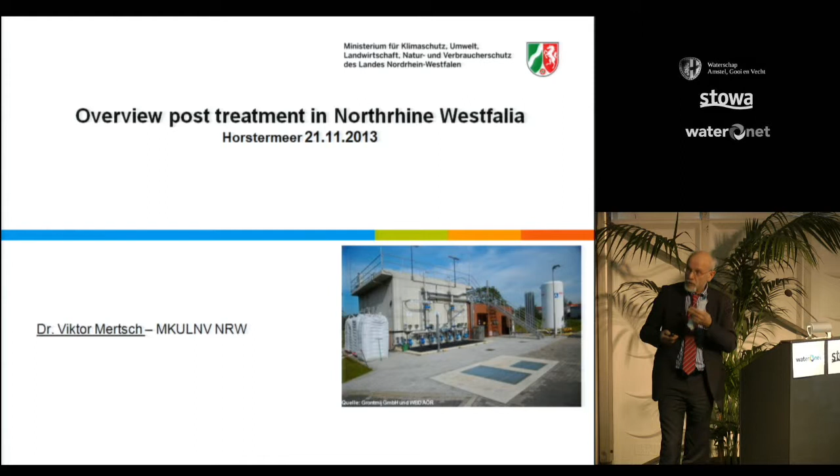So what are we doing in the field of post-treatment, as it's called here? Before I tell this, I will tell you a little bit how wastewater treatment is organized in NRW. We have about 654 or 645 wastewater treatment plants for 18 million people, comparable with the Netherlands. And the number of wastewater treatment works becomes less and less, and we will have about 600 in 5-6 years.

About 300 of these, and this is important, have a population equivalent of more than 10,000. And from this 300, 100 have sand filtration. It was established about 10, 15, 20 years ago for phosphorus removal. Today we have to look, is it necessary to have these sand filtrations, or can we look for another purpose for this part of the wastewater treatment?

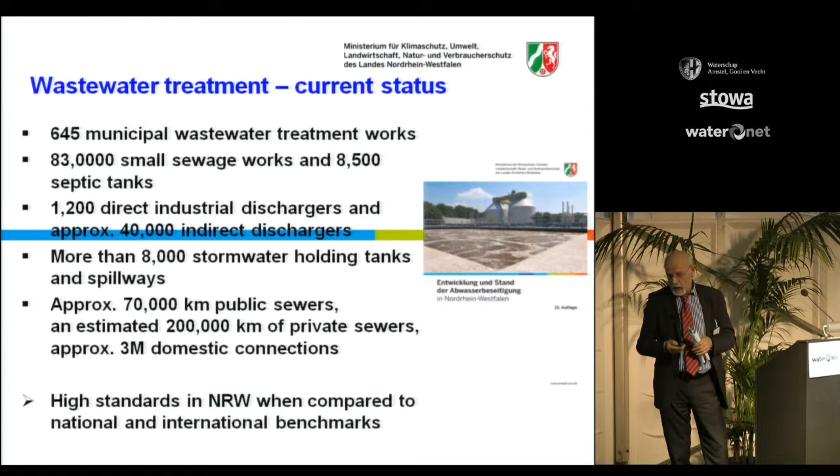Altogether, we think we have a high standard, if we look at European wastewater standards. But if we look at the fulfillment of the European Water Framework Directive, and we look at our waters, our rivers, we see we have a lot of problems. This is one part of one water body. We have about 80,000 kilometers of rivers, divided into 1,800 water bodies.

This is a figure of one water body, and it shows the monitoring 6 years ago, and we had a second monitoring finished now in 2013. The result is that if you look at chemical standards, you will find that about 20% of the water bodies are in a bad situation. If you look at the ecological standard, about 80% are in a bad situation. And if you look for the reason why the rivers are in a bad ecological standard, you will see that one important reason is the amount of micropollutants.

Why is it so? It is so because we look at the smallest animals, and of course for the smallest animals the amount of diclofenac, for instance, in nanograms could be relevant. So that is one reason why we look for the removal of micropollutants.

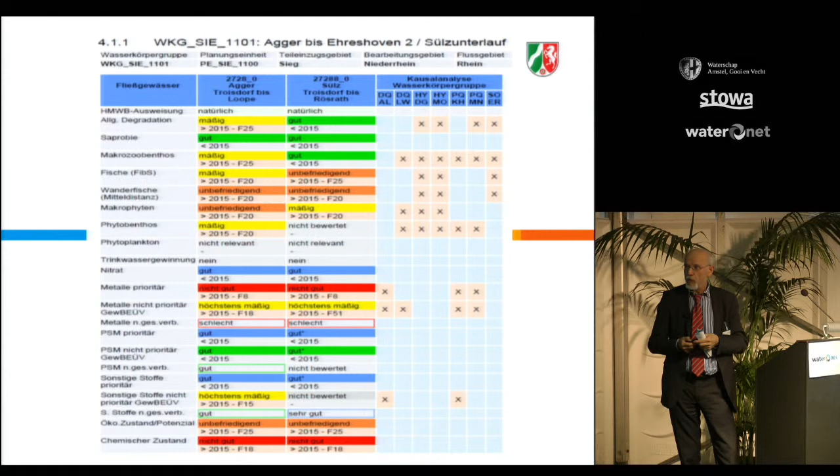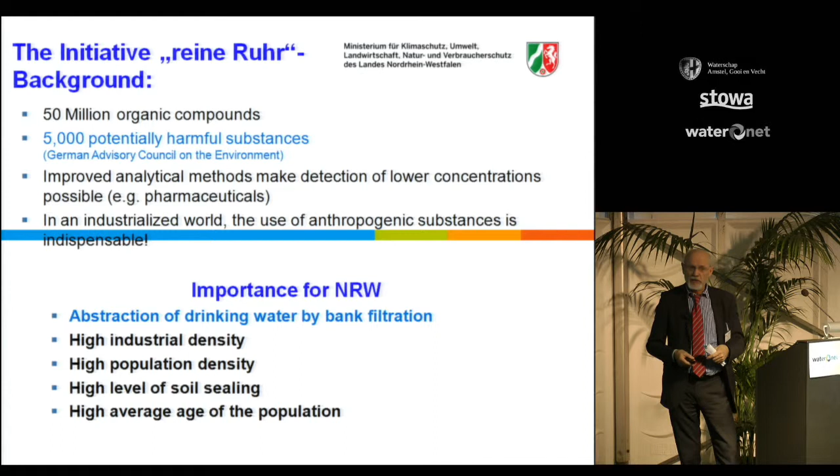But we started 5 years ago, and we started not by focusing on the European standards, but by focusing on our drinking water. We had a big problem in the River Ruhr with perfluorinated chlorinated substances, PFC. That was the reason to start a program, reine Ruhr, to look at what we have to do. We had not only the Ruhr as a river where we get our drinking water - about 70% of our drinking water comes from rivers. Therefore for us it is very, very important to look for micropollutants.

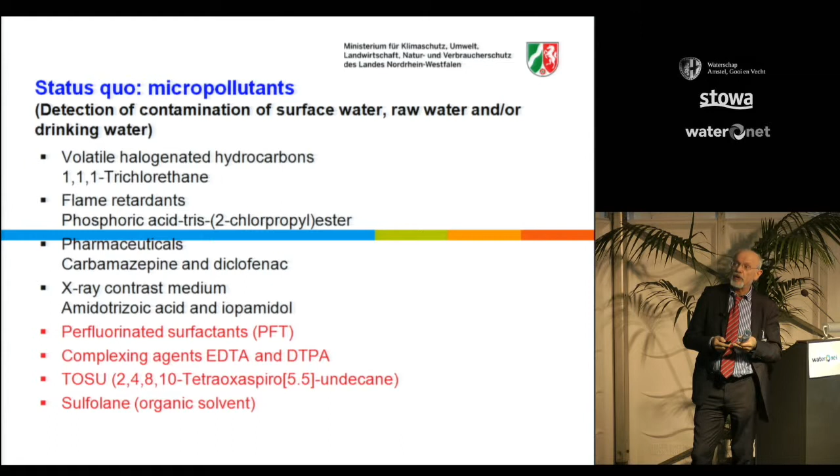In the first step, we looked only at the River Ruhr, at the amount of micropollutants which were in a concentration so high that we had to do something - those are the red ones. I will show what we have done to reduce the amount of these substances. And when we decided to make the program reine Ruhr, we decided to look much more broadly at all possible micropollutants in our river and to decide what we have to do in the future.

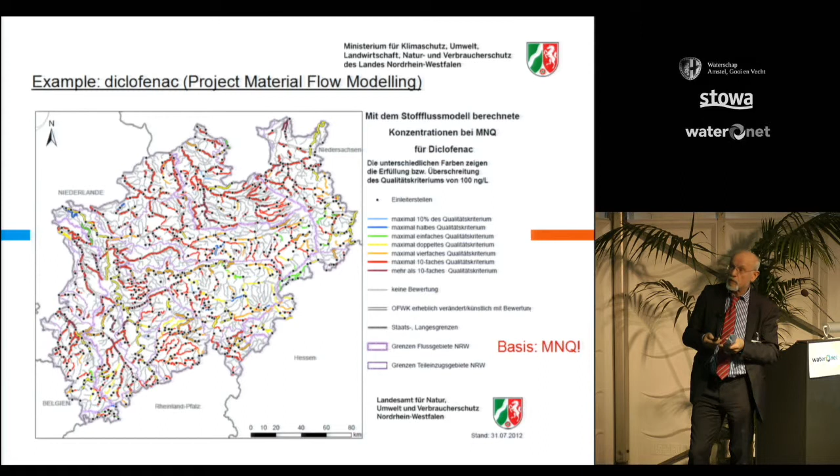For instance, we looked for diclofenac. If you look at the diclofenac levels we mapped with the material flow modeling, from Switzerland I think, you will see that a lot of rivers have maximum concentrations up to 10 times more than what is safe for a small animal. So it is quite clear there should be something done.

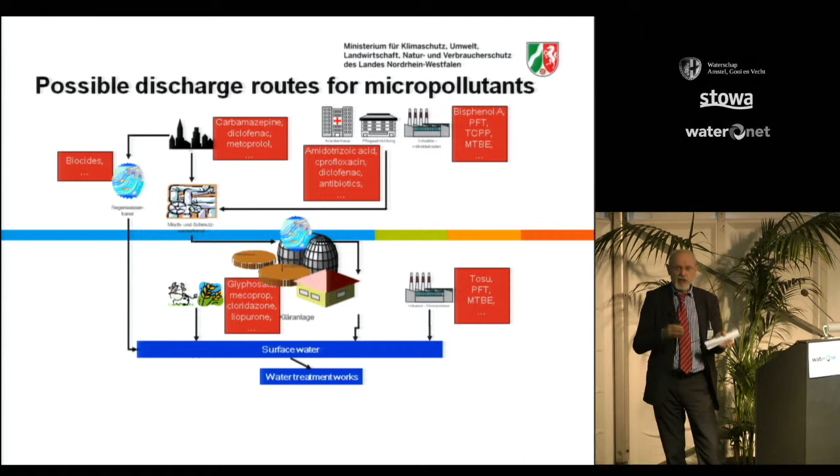So the question is where to start and where the micropollutants come from. We did a lot of work together with universities to analyze the main sources of micropollutants entering the rivers. If you look at the amounts, you'll see that about 70 to 80% of micropollutants come from wastewater treatment plants.

So we did a lot of development work from the beginning of 2008 until now, with 5 million euros. We looked not only at the rivers, but also at technologies, both in industries and in wastewater treatment plants run by communities. In the following parts, I will show you what we have done with the results from this research, and how we tried to reduce the amount of micropollutants entering the waters.

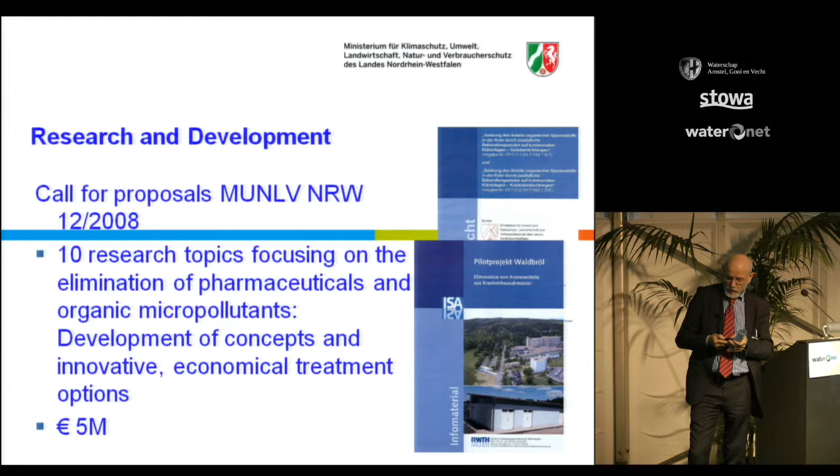First, as I mentioned before, I'm responsible for funding. We have a funding program that means every wastewater treatment plant operator who decides to build new or upgrade his plant, like here, gets 70% of the investment cost for the upgrade. For industrial wastewater treatment plants, we handle it individually, depending on the kind of treatment necessary.

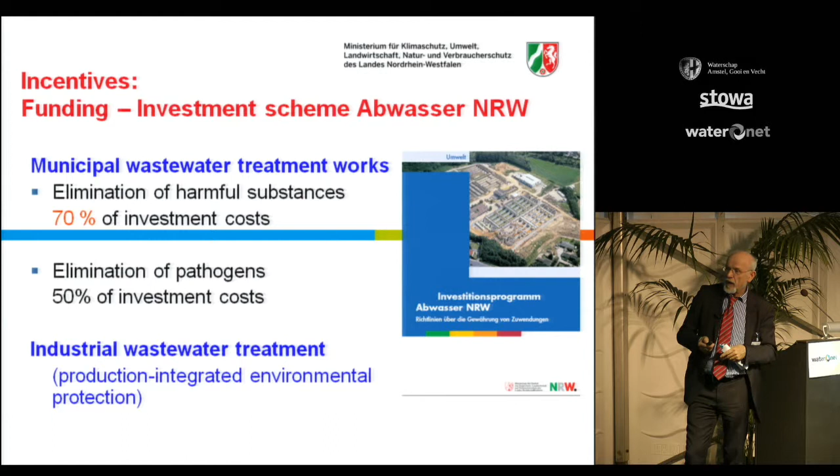So what is done with this money? I forgot to mention, it became clear very soon that it's not only necessary to speak with wastewater treatment plant operators, but with everyone — the politicians, the governors and so on. For this, we opened a Kompetenzzentrum Mikroschadstoffe, and the goal is to promote this idea of reducing micropollutants.

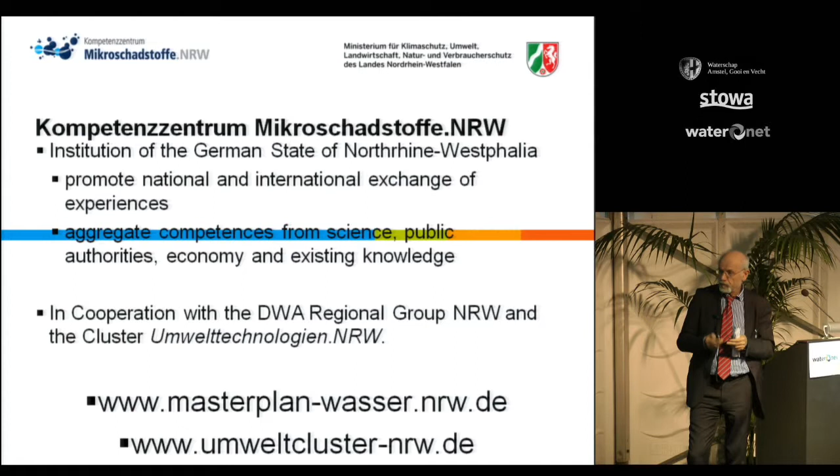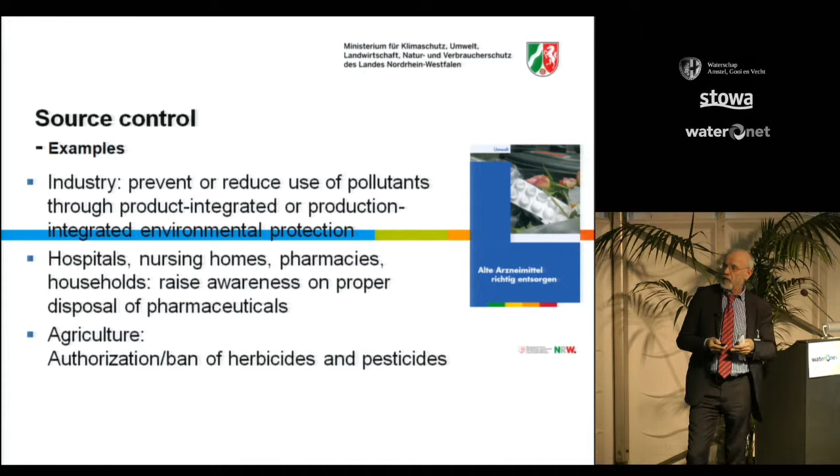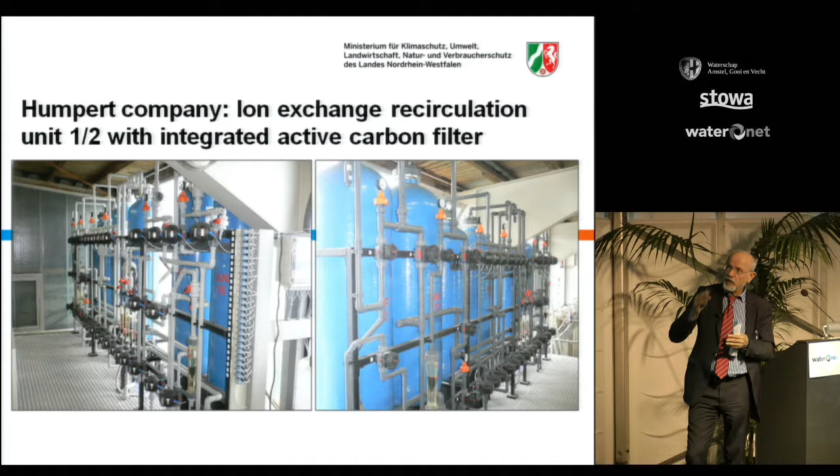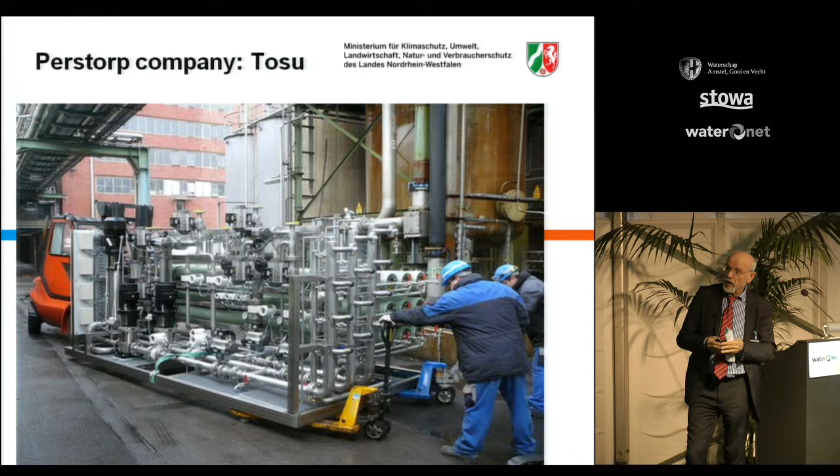Examples of source control in industry: as I mentioned before, we had a big problem along the River Ruhr with some substances, especially PFT. That meant small companies had to change their wastewater treatment very extensively — for instance, ion exchange at Firma Humpert, or the Perstorp company, which had a problem with Tosu. There we needed a very expensive wastewater treatment plant, so a lot of small companies had to spend a lot of money.

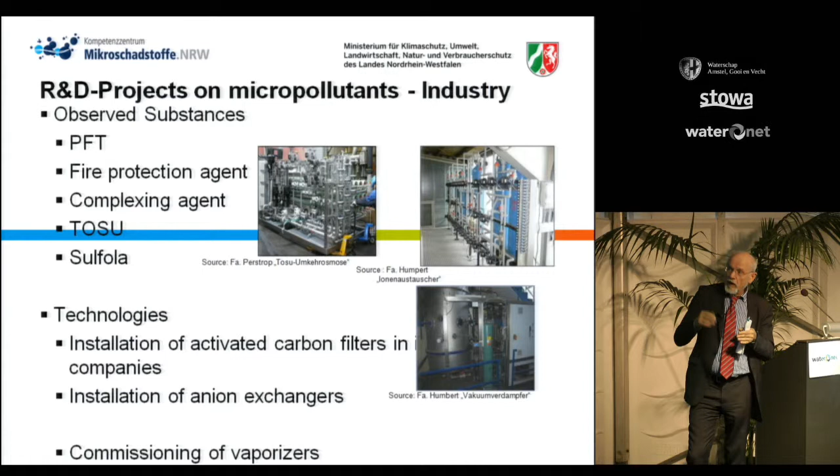To reduce special micropollutants which we don't find in every wastewater treatment plant, but only in special companies or special industrial fields. In this area, we will look to see if there are special industrial fields where we need to take action. We will do this over the next 5 to 10 years.

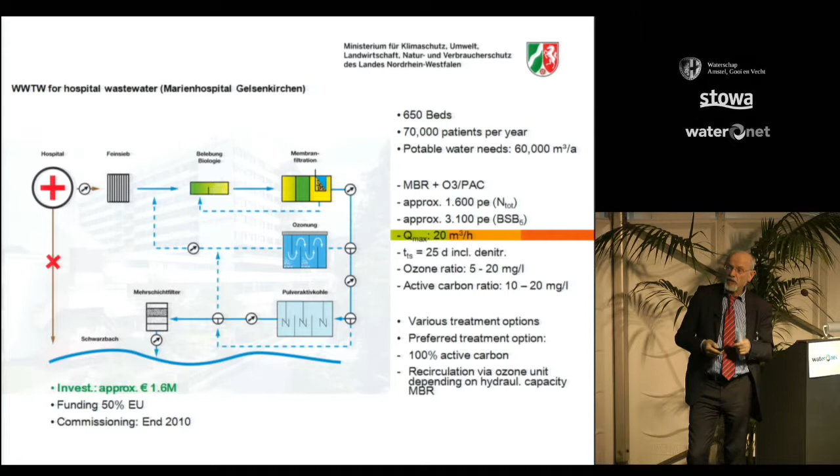We have to do biological treatment before removing the micropollutants, which makes it a very expensive kind of treatment. The investment costs were about 1.6 million euros for one hospital alone, and for another hospital, in Waldbröl, we had to spend 2.5 million just for the hospital wastewater treatment. Nevertheless, you will find some hospitals outside the cities, for instance, where this is still a possible way to reduce micropollutants. But overall, it is not the way we should go further.

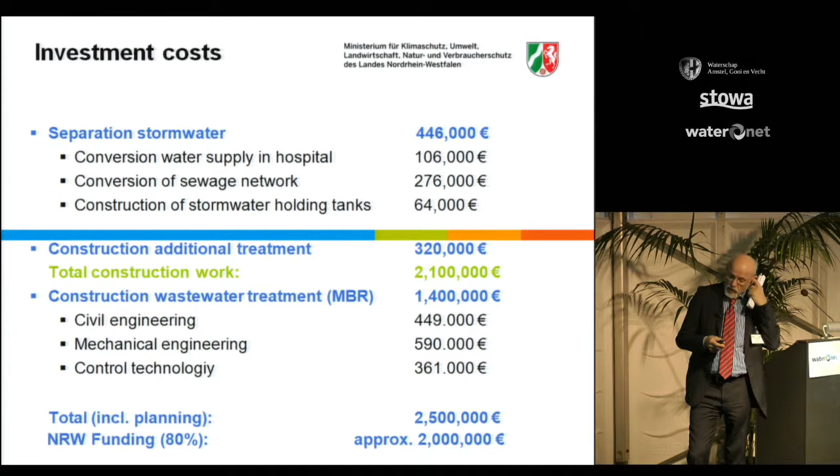Looking at our two hospitals, we also looked to the Netherlands to see what our neighbors do. A very interesting wastewater treatment plant is the Reinier de Graaf Clinic, and in Münster, the University Hospital of Münster is looking at this kind of treatment too, considering whether to use a Pharmafilter like in the Netherlands. Now I'm coming to the part about wastewater treatment for municipalities and what we have done in this field.

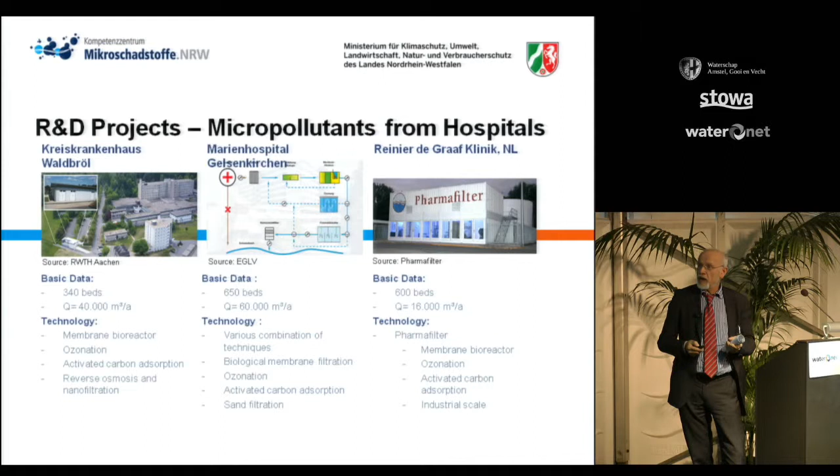We started with 3 wastewater treatment plants. The first one built was the ozonation plant in Bad Sassendorf. This wastewater treatment plant has been in operation since 2009, and we have two more: Duisburg-Vierlinden, started in 2011, and Schwerte, started in 2010.

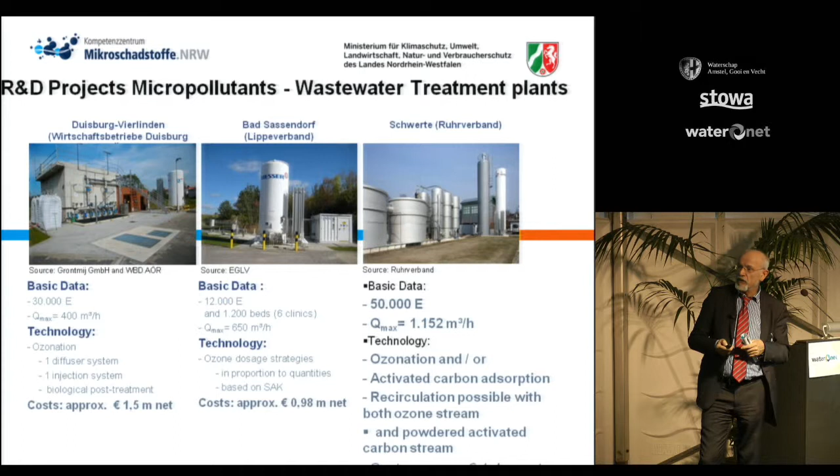From this treatment plant, we have not only the costs for investment, but also the costs for operating. It's very important if you're looking for capital costs for reducing micropollutants. In the meantime, we're looking for other possibilities, other technologies.

One other technology which is very interesting is the Bosman filter from the Netherlands. This Bosman filter is in a pilot plant at the treatment plant of Barntrup, tested last year. If you combine this with powdered carbon, it is much cheaper than using sand filtration. The city of Barntrup will build the wastewater treatment plant next year with this Bosman fuzzy filter. It's a very, very interesting technology.

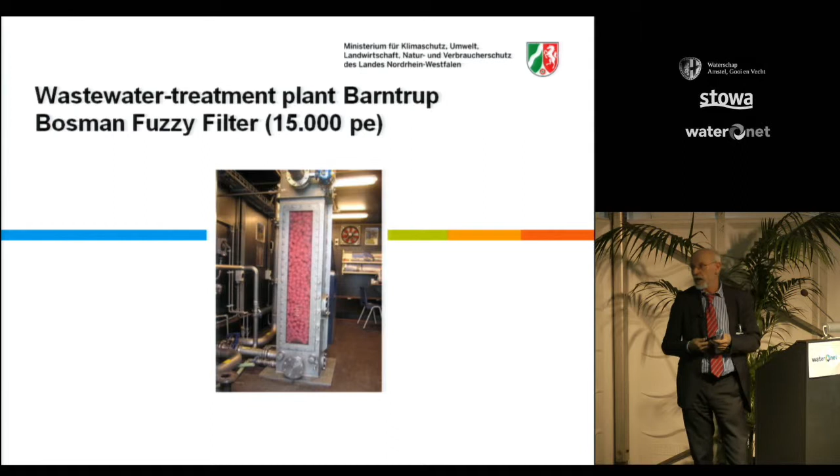We have another interesting technology, the wastewater treatment plant Obere Lutter. It's about 100,000 population equivalent. Basic data is 380,000 population equivalent, but it's less in the meantime. They have sand filtration, and we changed the sand and put in granular activated carbon. This is in total the cheapest way to rebuild a wastewater treatment plant, and it's nothing else like this plant here, but it's an old one.

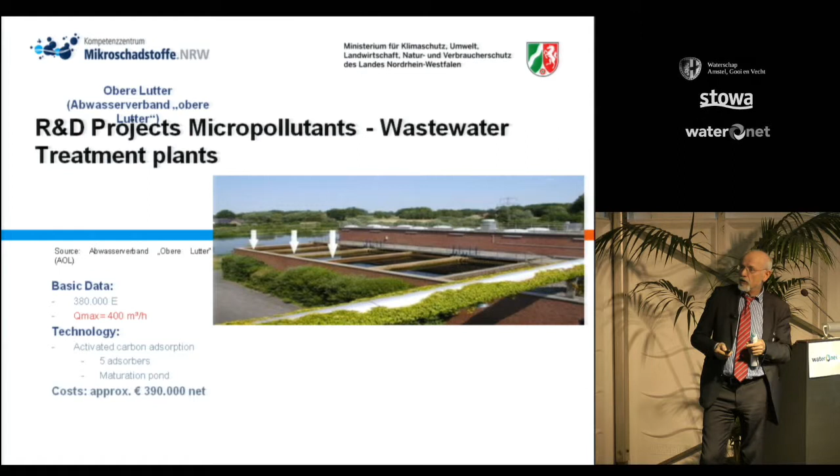So you see, we don't look for a special technology in North Rhine-Westphalia. Every technology can be used, and the decision is taken by the wastewater treatment plant operator. Before he makes a decision, normally he looks at the costs.

This is the map of North Rhine-Westphalia. On the upper left side, the Netherlands starts. You see the river Rhine. And you see here three different colors. The yellow color represents wastewater treatment plants which are rebuilt and which are in operation or start operating within the next year. The red one, and this is very important, are

wastewater treatment plant operators who make a feasibility study. We finance feasibility studies with 70% of the cost, and a feasibility study costs about 30 to 50,000 euros. This is the first step before a wastewater treatment plant operator decides to rebuild his treatment plant.

And besides this, you see this pink color. The pink color represents wastewater treatment plants where scientific pilot surveys are made, not a pilot plant.

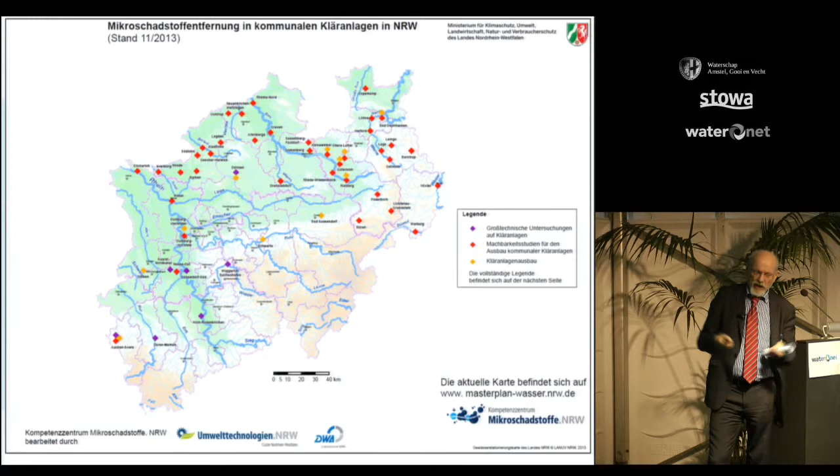In the meantime, we have about 2-3 more of this, about 15 wastewater treatment plants who will rebuild their treatment plants. And you remember, we are looking at about 300 wastewater treatment plants who are possibly in need to rebuild their treatment plant.

Important is that there is no order from the ministry to do this till now. This is all made voluntary, so the plant operator decides to make it.

But if we look now to the fulfillment of the framework directive and the next management plan, which we have to do in 2015, we will have to decide and say to an operator, you have to do it. That will be a bit difficult in public, but I'm not sure if we can go further the way we have done before, because you will find a lot of wastewater treatment plant operators who will do it freely, but there are some who don't want to, and possibly these are the very important ones for the rivers.

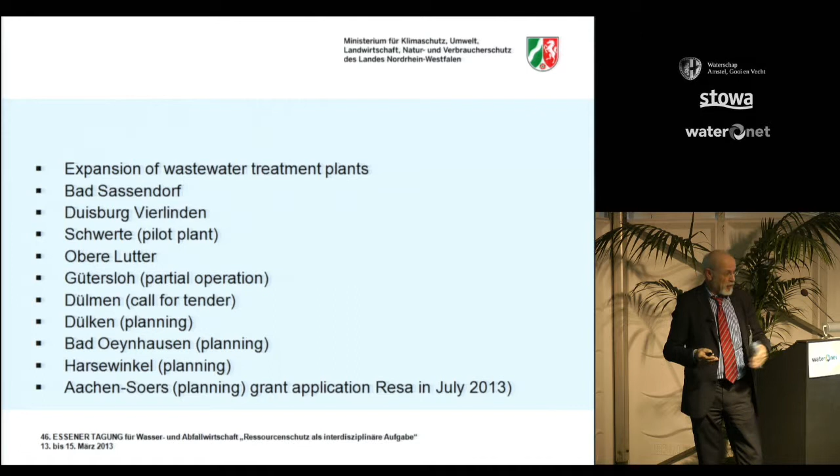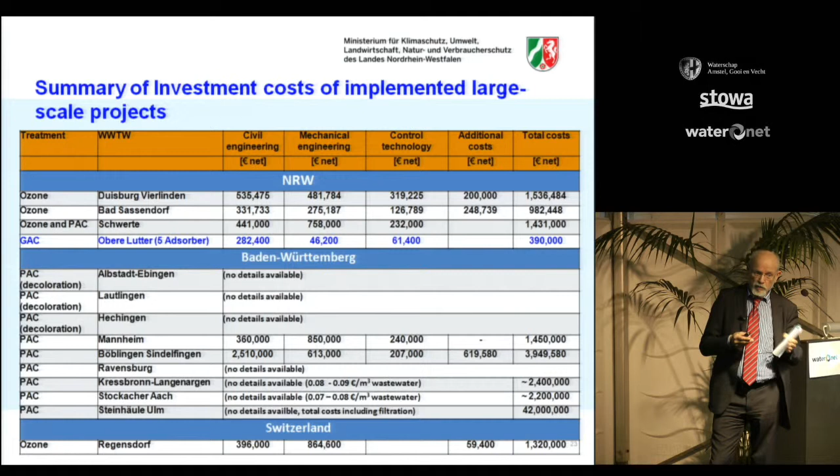So the last 3-4 slides I will show. We look, of course, a lot at the money. And I told you we have now the experience from the feasibility studies and from operating wastewater treatment plants. So we looked for standards to compare the costs of every treatment plant and to decide and to tell the politicians how much it would cost.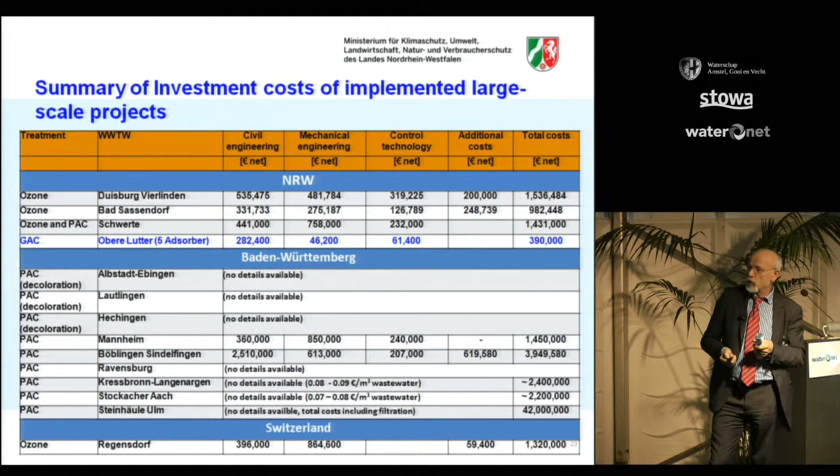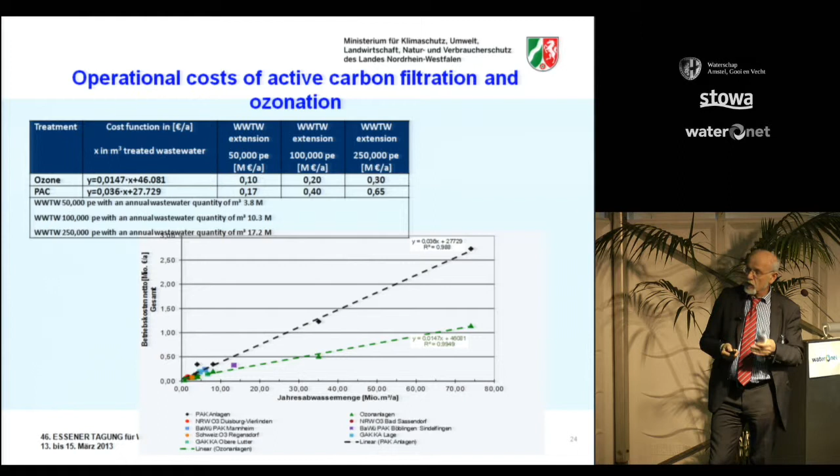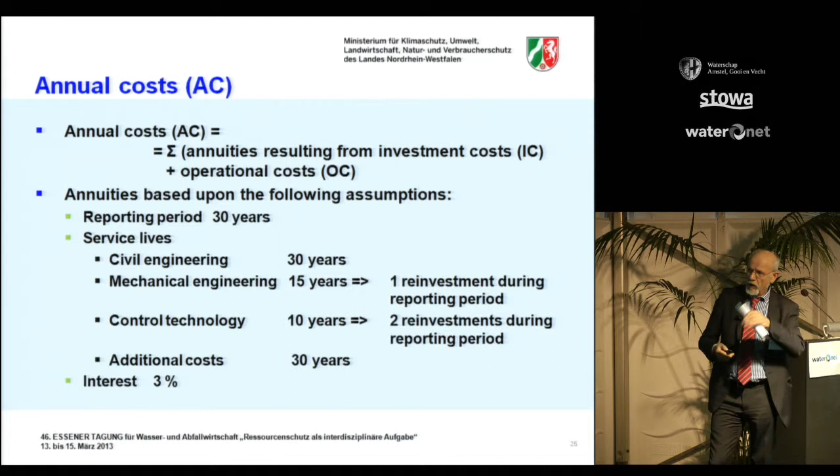So you can look at the comparison of ozonation and filtration, and it's clear that in investment costs, ozonation is still the cheaper technology. So you have to change this investment cost into annual costs. I will not go further into detail here. You have to look at how much it would cost in capital costs, so you can see how much it will cost per person.

And this is the relevant figure, and you see the bigger the wastewater treatment plant, the cheaper are the costs per person. And if you look at 100,000 population equivalent, you are in the region of about 10 to 15 cents per cubic meter of wastewater.

In the meantime, we find that the more feasibility studies we make, and the better the environmental science is, the cheaper the cost becomes. So in the meantime, I would say we can do it a lot cheaper too, especially for the smaller wastewater treatment plants.

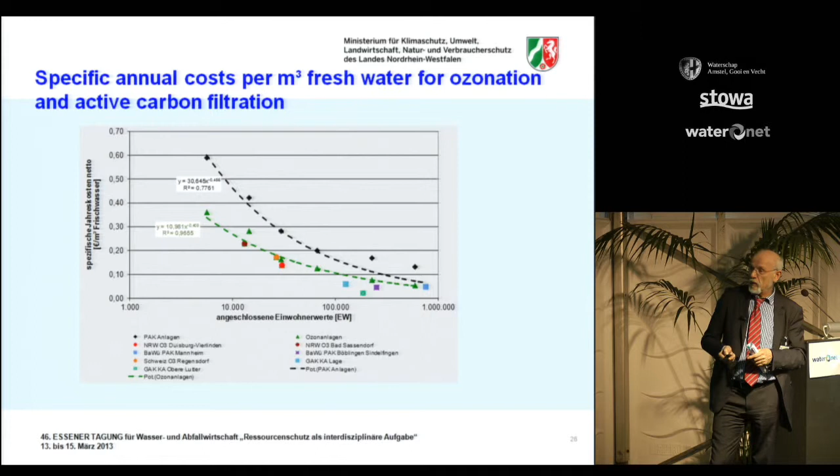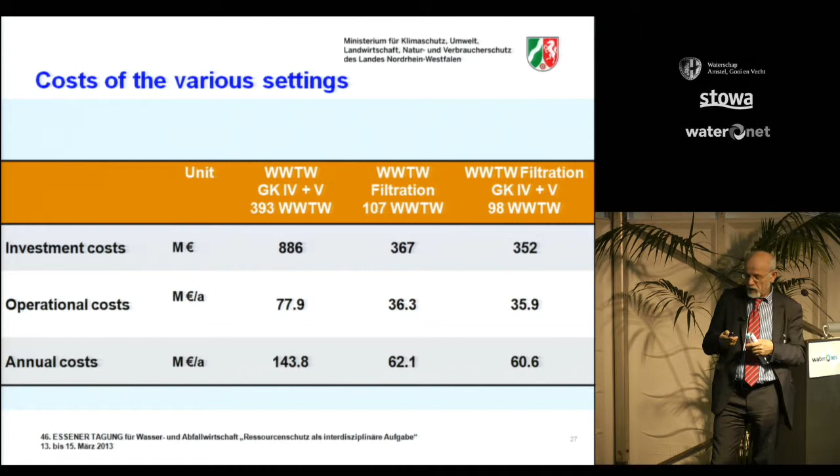So I come to a summary. In North Rhine-Westphalia, we are sure we have to upgrade our wastewater treatment plants, not in total, but especially those wastewater treatment plants which discharge to small rivers.

Otherwise, we will not fulfill the standards of the Water Framework Directive, and we have proved: is there a technology? Yes, we have not only one, we have more technologies. We have proved in a further way what the costs of this are, and we see the costs are in the region between 10 to 15 cents per cubic meter of fresh water. That means that is the amount people have to pay for their wastewater.

Last sentence: 15 minutes before I got a call from Düsseldorf, because we have in the meantime a big problem with Legionella in Warstein. Not in the beer, it's a good beer, a very good beer, but in the wastewater of this brewery, and that is a very, very big problem. So if we go further, we don't only have to look for micropollutants, we also have to look for substances which are important for health.

Thank you very much for your presentation. The opportunity for questions - who will ask? Was it all clear? I can't imagine.

Then I will ask my question again during my introduction: who thinks that we are a front runner if we compare? Bossman - okay, but maybe you remember that I said that we were front runners in designing technologies, but not in implementing. And I can conclude, I think, that you are far ahead of us when we speak about implementing.

I have one question for you: you said till now there are no obligations by government to introduce those techniques. Yes. Will such an obligation come in the next years? Yes. Okay, it's difficult, I have to explain.